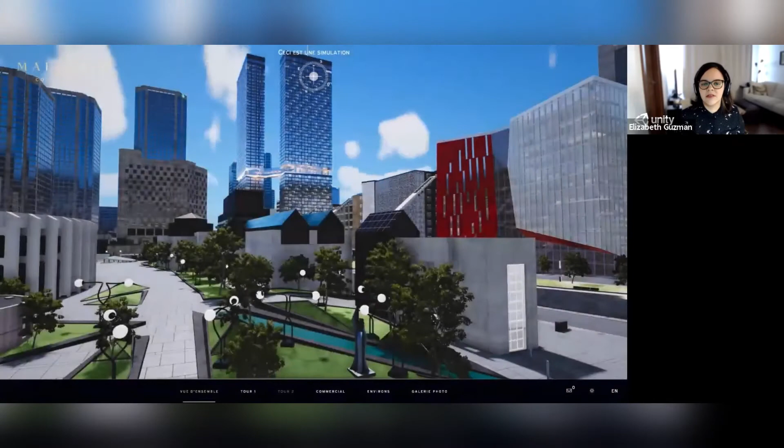You can change that material information as well, looking at the city, the vegetation, the lighting, and the different times of day. All this information is used in real estate to be able to present the model in a different way and hopefully have users experience it better.

They're doing a VR interactive walkthrough to detect flaws in the designs, the design layout, the virtual wayfinding of this airport. You'll see all the interactivity of navigating through the immersive environments, not only the interior but also the exterior, how everything looks, testing design options and layouts, how the walkthroughs will feel, whether it feels crowded, whether the space is right — you can modify it and prototype in real time.

You see the construction flow, also the traffic flow, the different components for operational effectiveness. For example, if I move this sign here, if I rotate it this way, is it better for the people attending the airport, for visualization purposes?

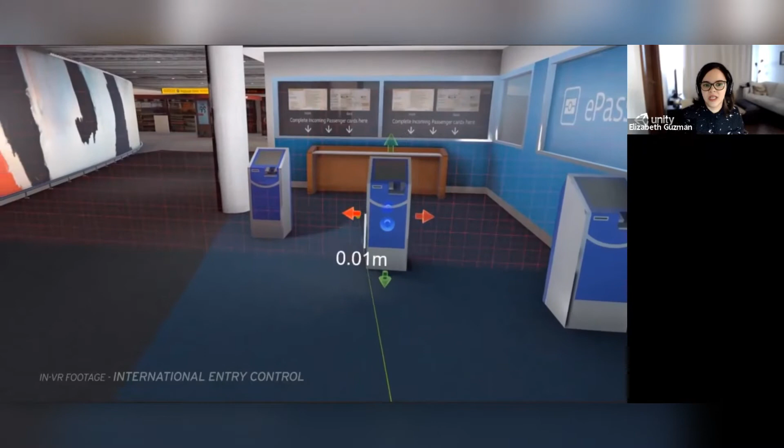You can also try to remove the check-in boxes — will that block circulation in the airport, how will that look? If you want to move the baggage claim sign, which I always miss when I'm at the airport for some reason, you can do that as well.

Not only the interior, but the exterior too. This is in VR — what if you add a wall in the middle here, what would that impact on circulation? So many prototype solutions with Unity.

Another example of how customers are utilizing Unity is for pre-construction, specifically for VR training and safety. Here we have an example of Skanska using the HTC Vive in Unity to train their workers without being on a construction site.

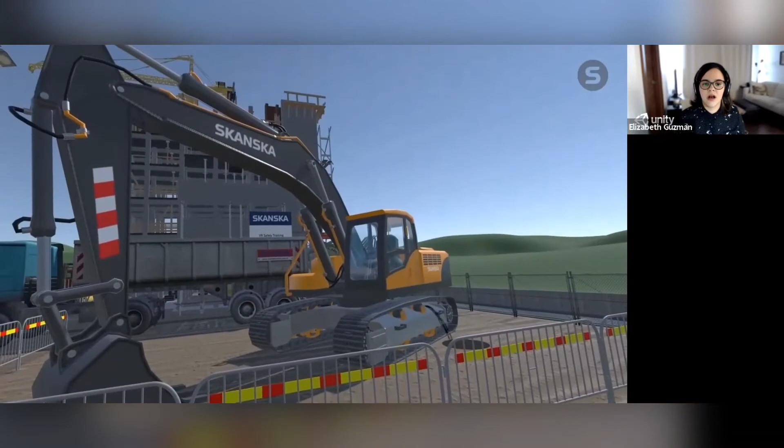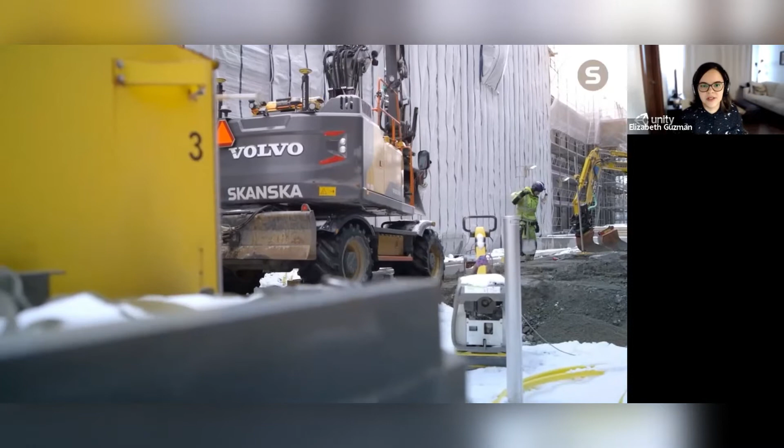In these times we're living in, you can train your crew in the safety of the office or the safety of their home, without having to be on the construction site. And as you know, the dangers of the machinery, other people on the construction site, the materials, and all that can be done safely and efficiently.

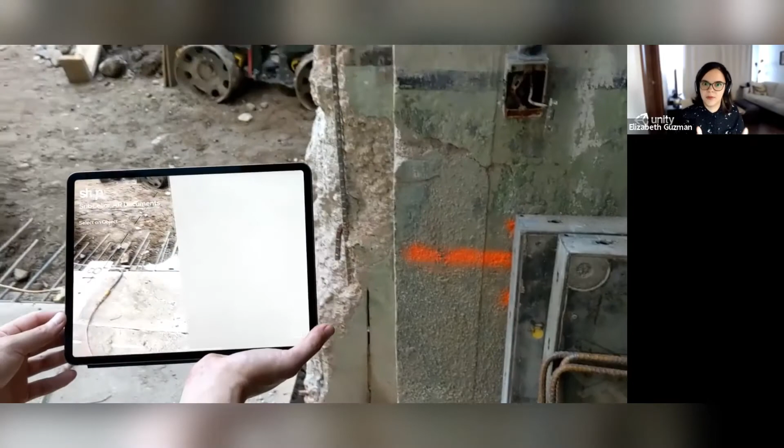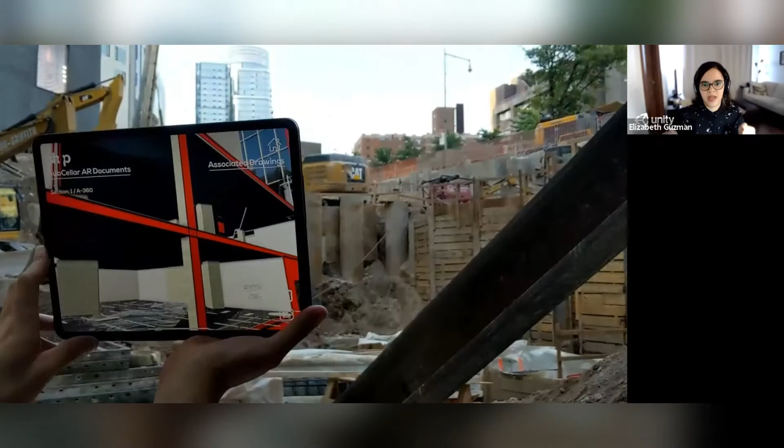Another example is AR construction guidance. Here we have Shop Architects, another of our clients, overlaying AR content into a real construction site currently being built in New York. You just grab your iPad and go around the surroundings of your building, visualizing everything with AR before the construction is done. Imagine utilizing this instead of going through thousands of pages of paperwork and PDFs on the construction site, just having your iPad or mobile device to do this type of analysis.

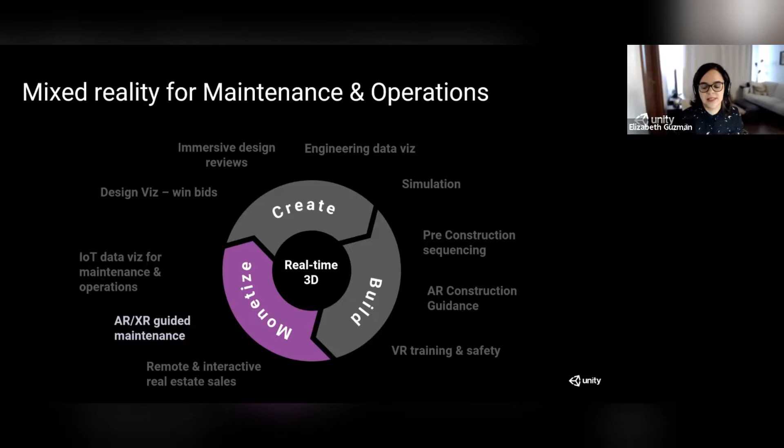Another example: let's say the building is already there, construction already happened, but now you have to maintain and operate the facilities. We have AR/XR guided maintenance. Here we have Taqtile with King County doing this type of training for workers on different machinery and different activities or menus. You have the content for training, and you can experience all the different steps. Imagine if on your first day on the job you don't want to push that red button, you wouldn't feel comfortable. So this is a comfortable way to do XR guidance in Unity.

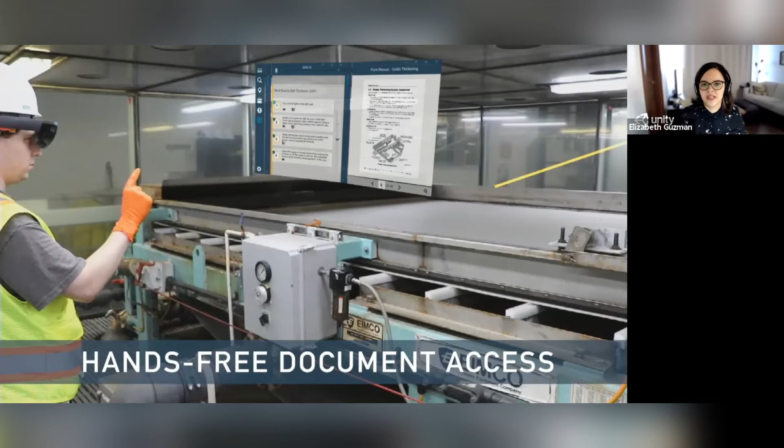We are talking about real-time 3D, but what is real-time 3D exactly? Well, it is something that is immersive, interactive, looks real, acts real. It's like a high-end video game. So with real-time 3D, you can walk through a space, through a model, open doors, change materials, see information in there, and everything — the animations, the lighting, the reflections — is being rendered in real time.

With that information, we were curious to know what companies outside of games, specifically AEC and manufacturing, think about real-time 3D, if they find it useful. So we conducted a study with Forrester last year, and 97% of companies in AEC and manufacturing that participated said they see great potential in real-time 3D. 94% of those companies have invested or are expanding their investment, and on average companies in AEC see at least 6 use cases for real-time technology.

However, only 19% are actually doing it. And the ones that are, only use it for really large models or pretty late in the design process, when this type of technology is no longer as needed. And it's difficult — we understand that the process of creating anything real-time is difficult, and there are many reasons behind that.

So with all this information, what is Unity doing about it? We partnered with Autodesk to create native plugin applications inside Revit and Navisworks to seamlessly integrate the data conversion and transformation process. Through that collaboration, Unity Reflect was born. What is Unity Reflect? It is a BIM design and coordination solution that connects all project stakeholders and members in one immersive, collaborative, real-time platform, regardless of the device they're using, the model size they have, or their geographic location. You can transfer BIM data from Revit, Navisworks, SketchUp, and Rhino.

We have plugins inside all those applications to convert into real-time 3D experiences that you can use on a range of devices. And we see that today — you can have augmented reality, you can do VR as well. With those types of devices and applications, you're allowed to bridge the gap between design and decision makers.

So it is a design review and coordination solution that allows you to do different things. You can communicate design intent in an immersive, interactive environment where everyone can participate and give feedback. It also enables faster decision making through data federation and live link.

So any changes that you make in the model, like in Revit, you change a window or the material, you'll be able to see that right away in Reflect. You can access this on any platform and any device, and store the information in the cloud or locally. You can use your computer, laptop, AR or VR headset for this.

It's also flexible. We provide the source code, so it's a flexible application that can be customized and built upon if you want to do even more than what we offer out of the box. So this is all the introduction to give you an idea what Unity or the clients are using for AEC. Now we're going to give you a live product overview of our current AEC offering, Unity Reflect. And with that, take it away, John.

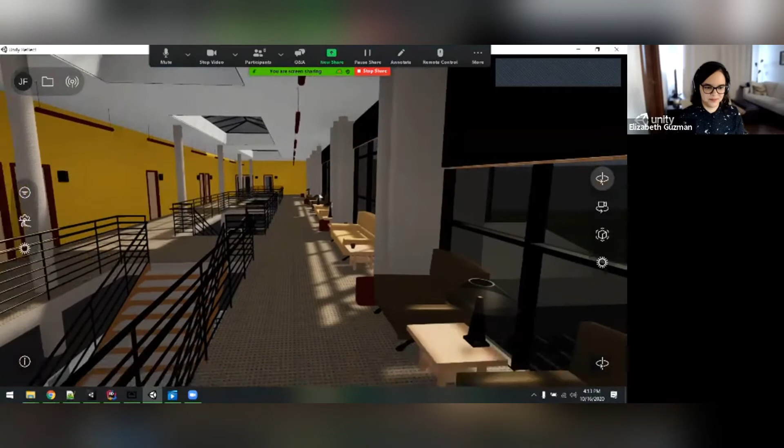Okay, you see my screen all right? Yes, we can see your screen. Okay, well, thank you.

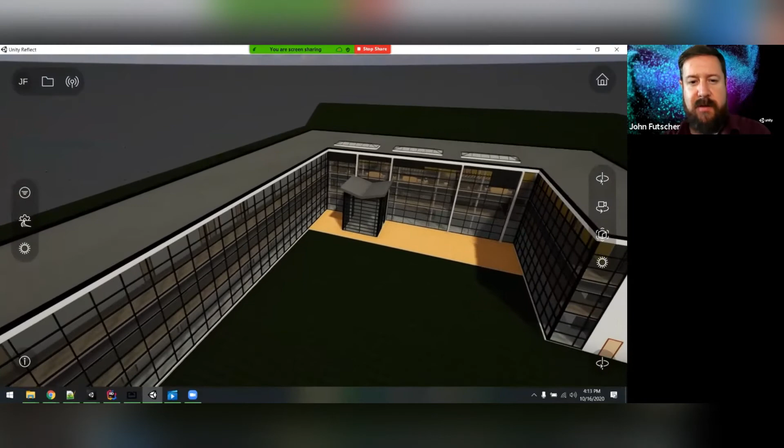As Ellie mentioned, this is Unity Reflect Viewer. It allows you to conduct design review or work with other folks on the same project from anywhere in the world on any device. So what we have here is actually a visualization of a model that is in Revit. Hundreds of miles away, Ellie is in control of that model inside of Revit. Without having a powerful PC or having Revit open, and being an architect myself, I can get a real-time look into what that could actually look like from where I am.

And it's not just a visualization tool. It actually allows you to see all the BIM data from the project. I can select different objects and actually see the IDs and the categories and families that they're associated with. It allows you to bring in folks that might not be technical and allow them to see and have actionable insight on your project in real time.

So I can say, for example, if I saw an issue, maybe that this flooring wasn't correct, I could say, Ellie, could you please change that floor to the hardwood that we talked about? And there it is. It's linked live over the cloud back to the actual Revit project that she's in. So she's in Revit, she's got full control over the project, and she can change things, update things in real time, and I can see them through my viewer on any device at the same time.

And this is really important for communication. It allows you to have actionable feedback. It allows you to make sure that my request was heard. I asked her to change something in the project, and I know that it wasn't just copied down in some meeting minutes and then applied later. I can see that it's actually done in the document of record right now, and I can see the results.

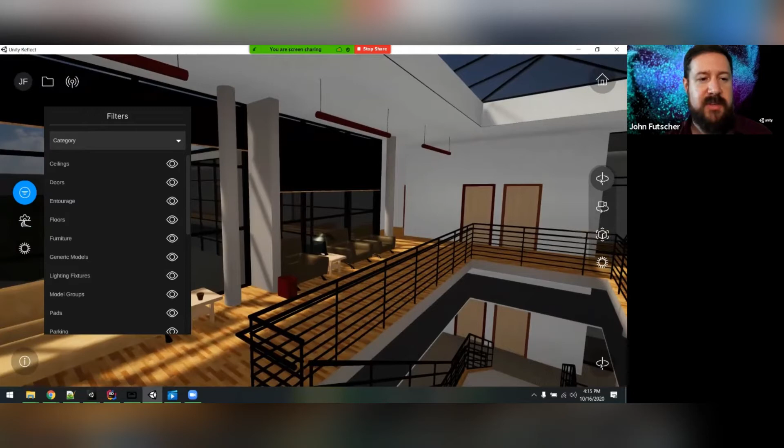It also allows you to do things like filtering on all that data that comes in from Revit. So we have the ability to categorize things and filter, like here's all the doors, or the ceilings. We also have the ability to break things out into different potential phases. So this one's actually a phased out diagram, so we can back away steps of the process and see what it would look like at different points in construction.

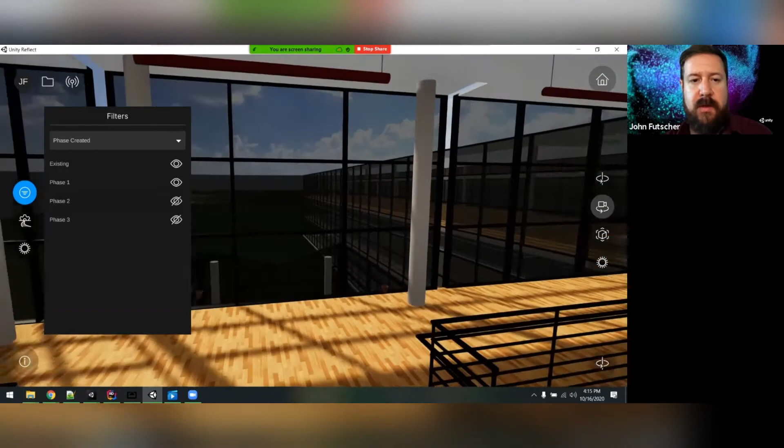And we can bring them all back in pretty easily. But we can also hide unneeded details, like all the textures. If you're looking for a white card review that is more about the layout and making sure that everybody kind of stays on topic and focuses on things that matter, we can hide these things.

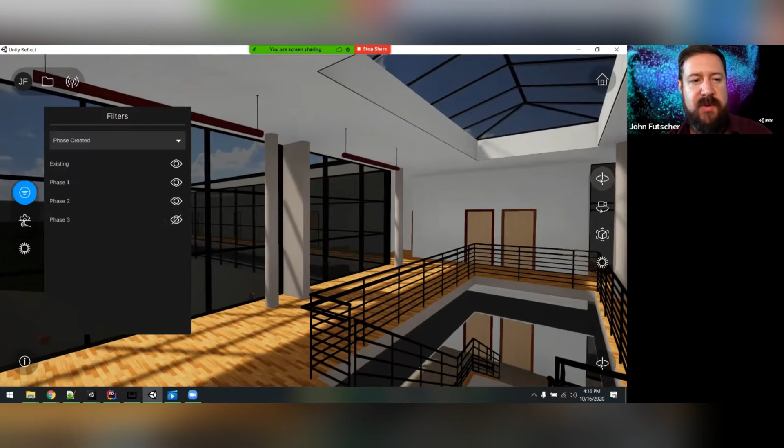And we can also light things. So if we bring this back in, we also have our lighting. We can turn on the interior lights and get a sense of what the space would actually look like without natural light. This would be important if you're trying to review the space with the people who are responsible for the lighting, but also that leads into our sun study tool.

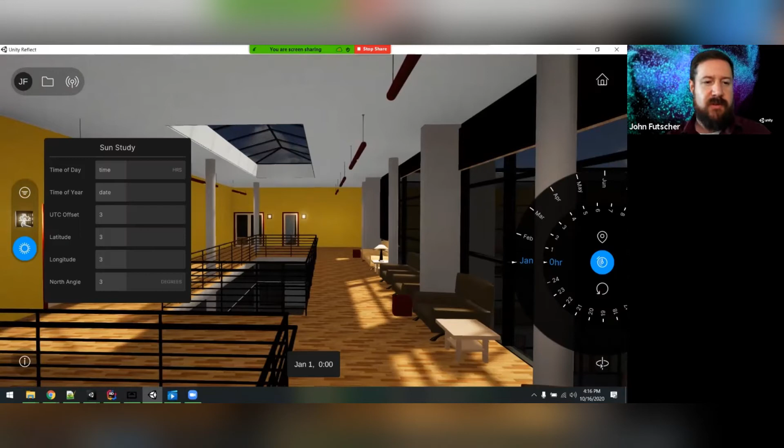If you know the location of your build, you can put in your latitude and longitude of anywhere in the world and your time of year and say, what would the light look like in this room in, let's say, early morning in the winter. And we can see that around 6 o'clock there's a lot of sun going into these doors. It allows us to see in real time what that might look like.

And we can see even further if we back this out. If those window shades weren't there, that's what it would look like. But we can see that update in real time.

And everybody gets their own view into the project. This is my own personalized view. I don't need any real technical expertise or background. Your standard mouse and keyboard inputs work. You can also teleport around in the space by double clicking.

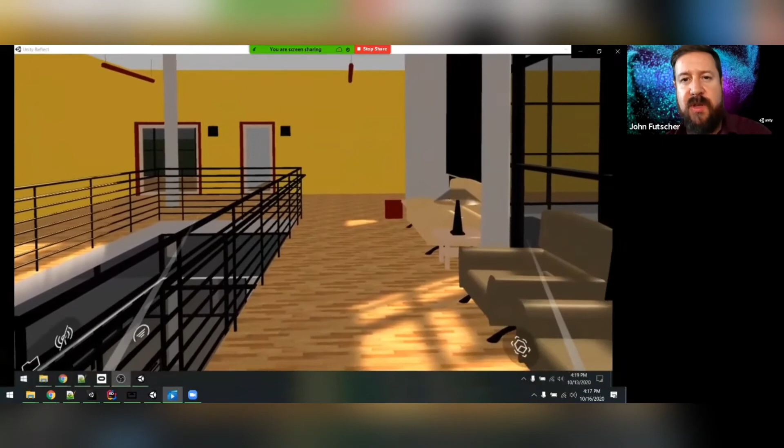And furthermore, right out of the box, we offer the ability to have other views, such as virtual reality. So here's the same space being viewed in virtual reality. I know some folks might have attended a webinar earlier about how to use VR with Unity. Unity and VR work really well together, and so does this.

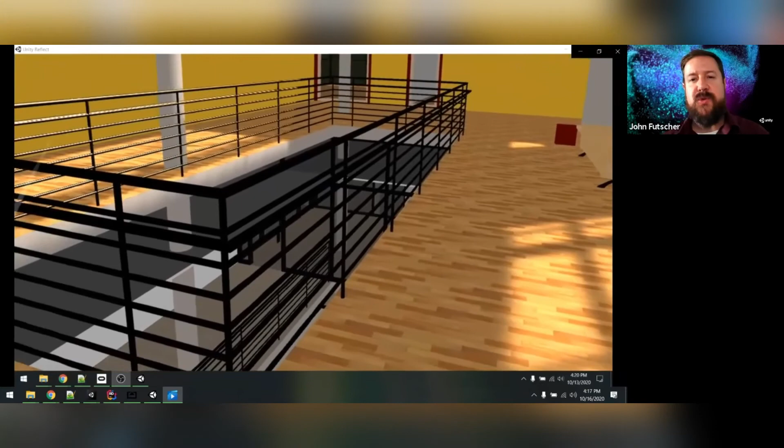Without any other preparation, you can use that same data from your Revit model, bring it into the viewer, and in one click fire it up in your Oculus Rift headset, and visualize what it could actually be like to be there within your headset.

VR offers that real, true 3D stereoscopic rendering, so you can actually see how far away the walls are, feel the size of the room, like is the hallway too tight, does the room feel nice and airy? But that doesn't come with any lack of functionality.

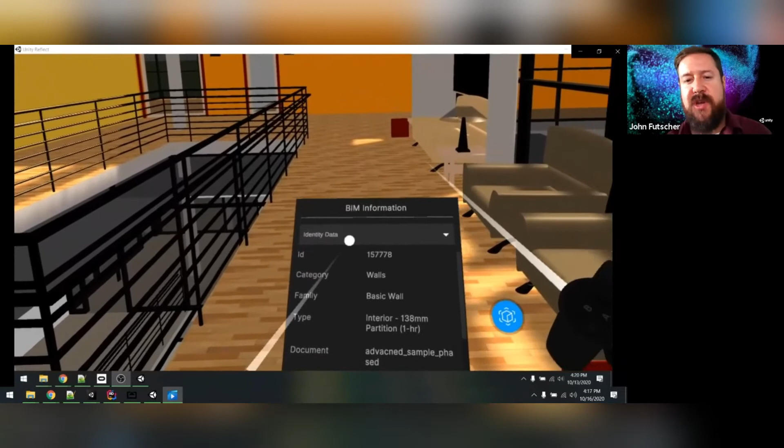The same filtering and BIM data selection tools are also available in the VR view. This could be a really great way to get a sense of the space you're actually building without doing any separate processing. You can simply jump in your headset and look directly at what would be in your Revit model.

It can also generate excitement amongst your customers, giving them an idea of what they're going to be looking at when it's complete. We also recognize that not everybody might have access to VR headsets, but one thing that's fairly ubiquitous these days is mobile devices. So here is the same project being viewed on a mobile device.

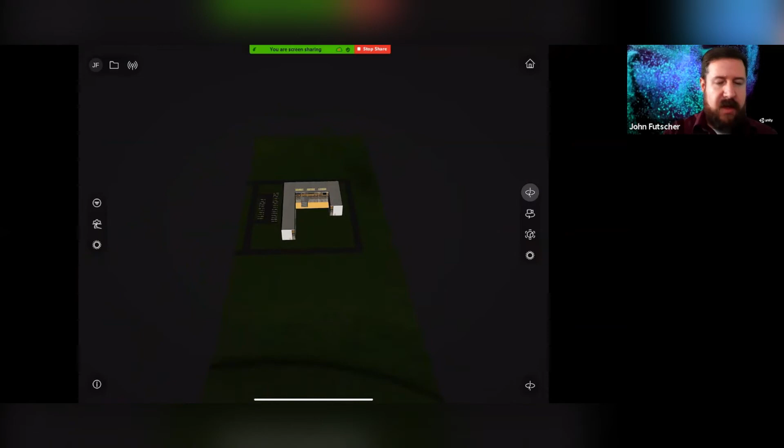And if I asked Ellie to change the exterior of this building, we could see it updated live as well. This is all the same data, just another view on another device. We have the same ability to get our BIM data, select different objects, and see the exact data related from the project, with simple touch commands and simple basic filtering.

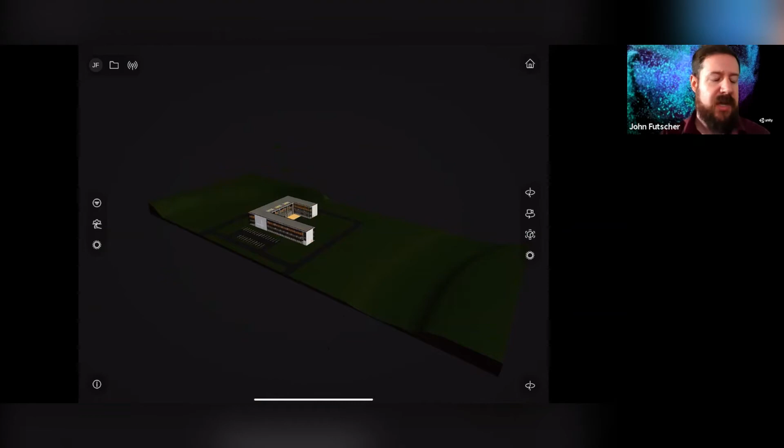Now, the main question I generally expect is, how am I going to get my giant architectural model onto a mobile device and be able to look at it? Well, to that end, let me load a slightly larger model than the one right here.

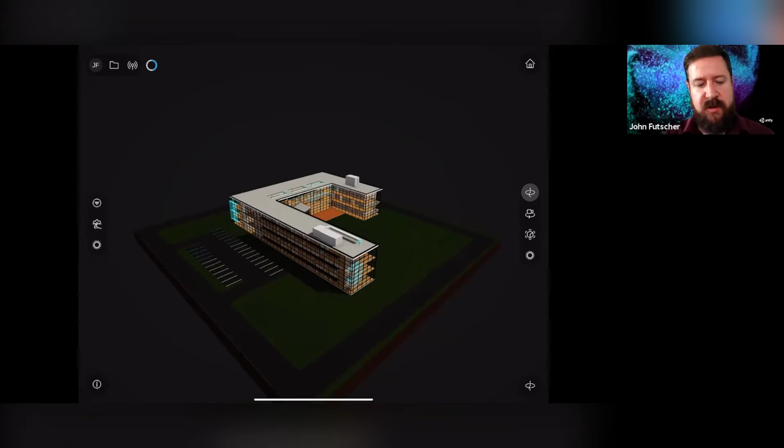What you're seeing right now is our progressive streaming algorithm. There's a custom algorithm at play here that allows us to load the model iteratively. It will focus on whatever's closest to the view, allowing you to begin interacting with your data immediately while it's not all completely loaded. It will all eventually load, and it will load on any device, but it also lets you get right in and start looking at things without having to wait.

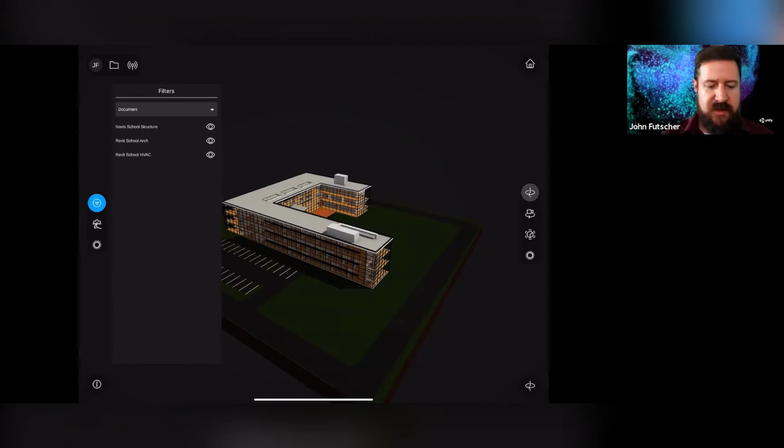This is an even larger model than the one I showed before, because it also integrates federated data from Navisworks, allowing us to isolate things like the HVAC system, or just the structural diagram, or view them together with the architecture to see if there are any conflicts. It's a real intuitive way to see that.

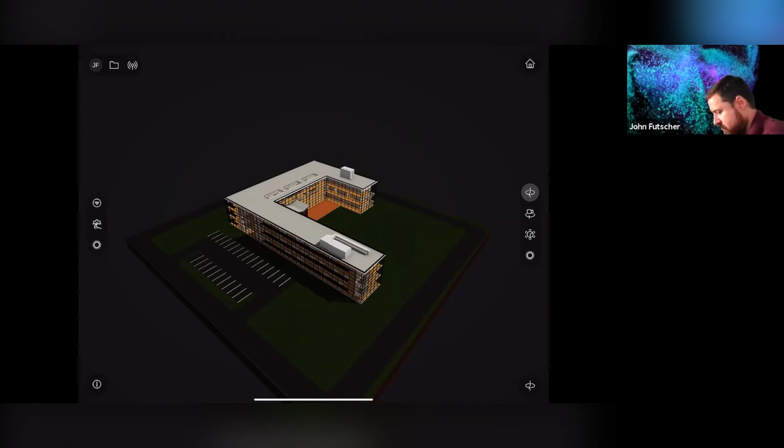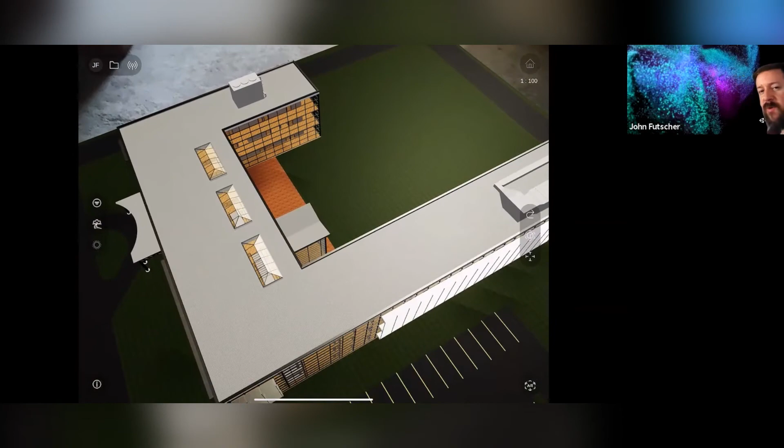And lastly, but certainly not least, we also have the ability to put this out in augmented reality. This is great for extremely non-technical folks because it requires literally no inputs to get a different viewpoint on any given position. I can stand up and walk around the model and look at it from any point with my mobile device.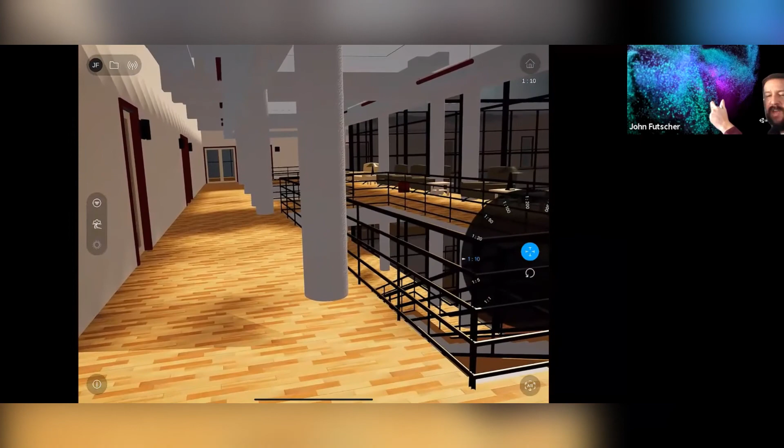And of course, I have access to all the same filtering tools, but I can also scale it. I can bring it up a little bit bigger to get a view into the space, similar to what we see in VR, but this is also just through a mobile device—Android or iOS, any device can do it.

You can see right through and bring this all the way up even to 1-to-1 scale, so it's almost like walking around into the space. You can actually see what it might look like turning around into different areas. And this is all the same data coming directly from the actual project itself, viewable in multiple different ways in the Reflect viewer.

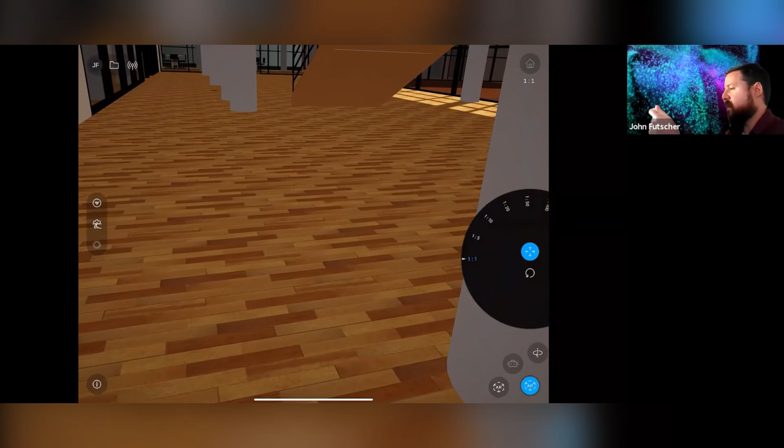And with that, I'd also like to note that if there's anything we showed with the Reflect viewer that you thought was missing, or something else you might want to do with it, the Reflect viewer itself is actually built with Unity. So with Unity Pro, you can customize it into anything else you could think of. It's all extensible—you can develop your own custom solutions.

Ellie showed an example from SHoP Architects using the 1-to-1 scaling—that was the Reflect viewer. They made a custom solution to show their building at the job site before it was completed.

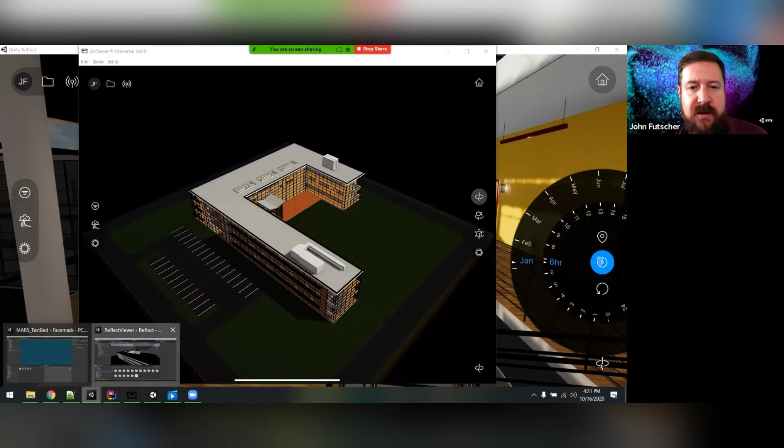That's absolutely something that you can do by extending it out. It also has integration into the editor itself. So if I pop up the editor, here is another look at the model I just imported real quick. It's all gray boxed right now, but this is the same model we see here directly in the editor.

With the structural and HVAC stuff that you just saw. Once it's in the editor, if you know how to use Unity, and there's lots of free tools, resources, and trials available, you can pull this right out of Revit or Navisworks, get it into your system, and build on top of what we've already shown.

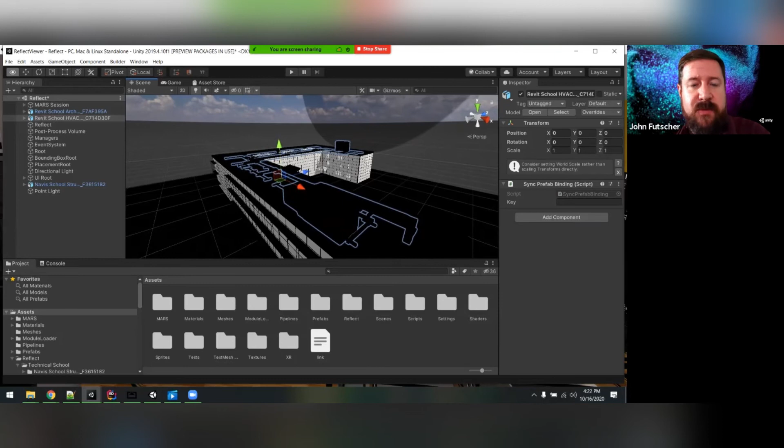Let's do our small recap of everything that we saw. As John was mentioning in the presentation, for Unity Reflect we have third-party plugins for different applications, including Navisworks, Revit, SketchUp, and Rhino.

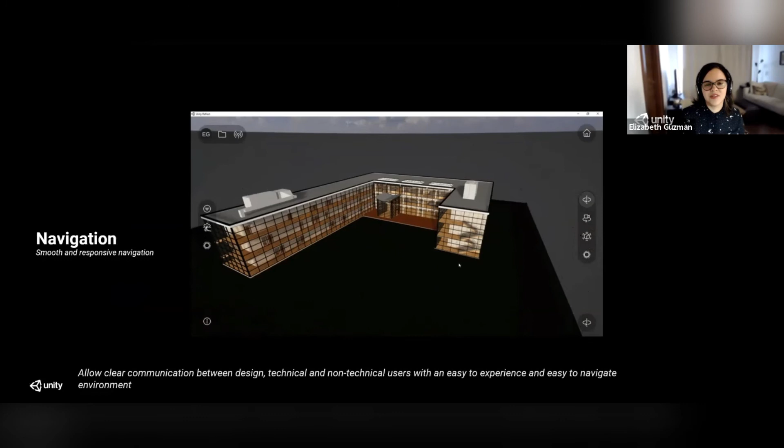We have the cloud option that allows you to share your model to the cloud so it's accessible to anyone, tying the office to the field. You also have easy-to-use navigation that doesn't require additional training for users to immerse themselves and interact with the model.

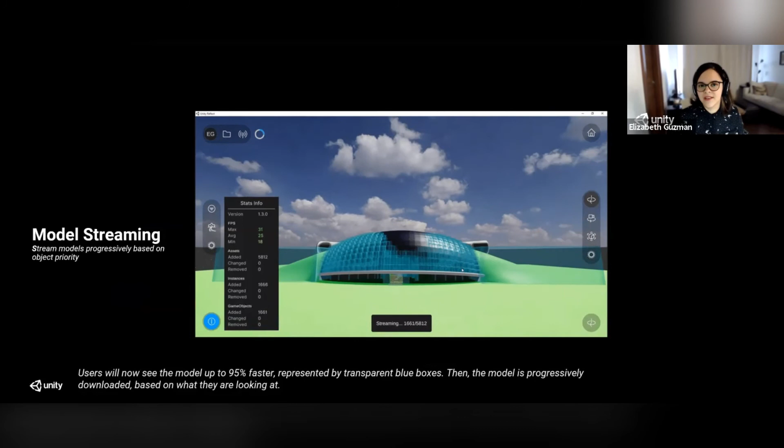As John showed, we have model streaming, which allows you to load the model 95% faster, so you don't have to wait for the entire model to load to interact with it. That's the progressive streaming we have, and based on what you're looking at, object priority lets you view your model different ways.

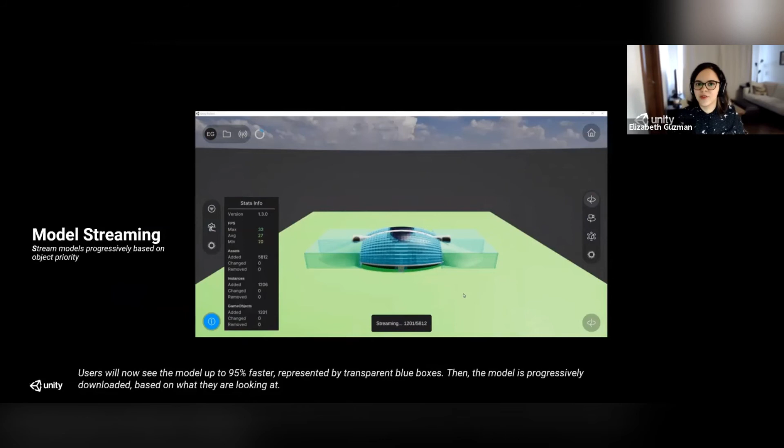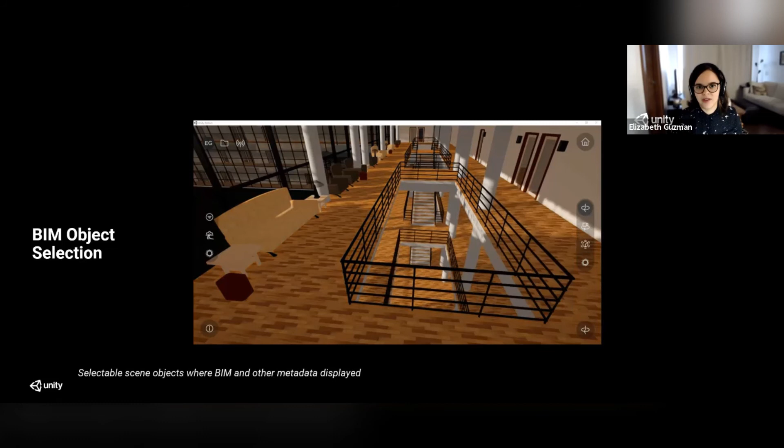You also have BIM object selection, so all the information from your platforms, Revit, SketchUp, Navisworks, and Rhino, can be visualized by selecting different components in your model. You'll see all that derived data and can filter by it. As John presented, you can isolate information, or simply hide and show information in your model.

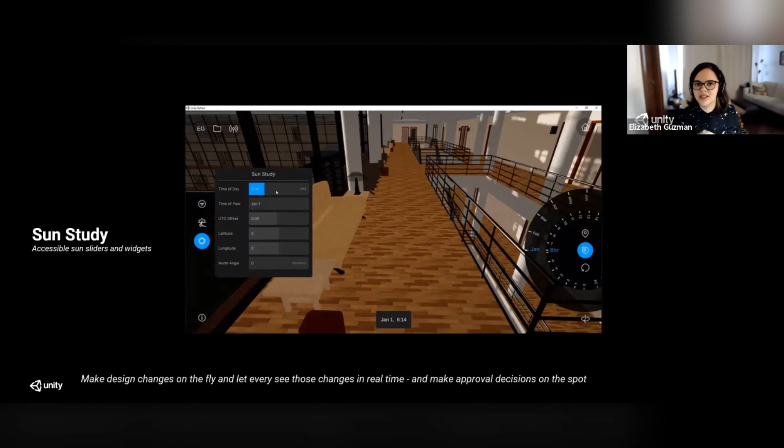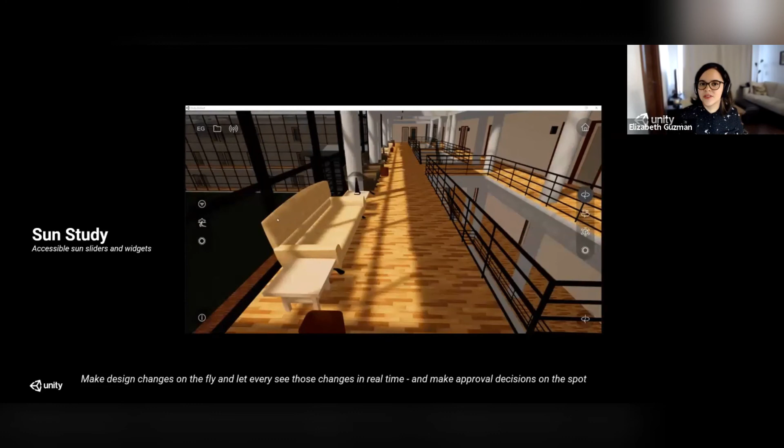You also have the sun study tool, an easy, accessible wheel you can slide with clicks on your computer or your fingers on a mobile device, to look at the sun at different times of day and year, analyzing natural and artificial lighting conditions in the space.

And as you saw, you don't only use Reflect on your desktop or laptop, you can also bring it to VR and AR modes, allowing anyone to access their optimal platform of choice.

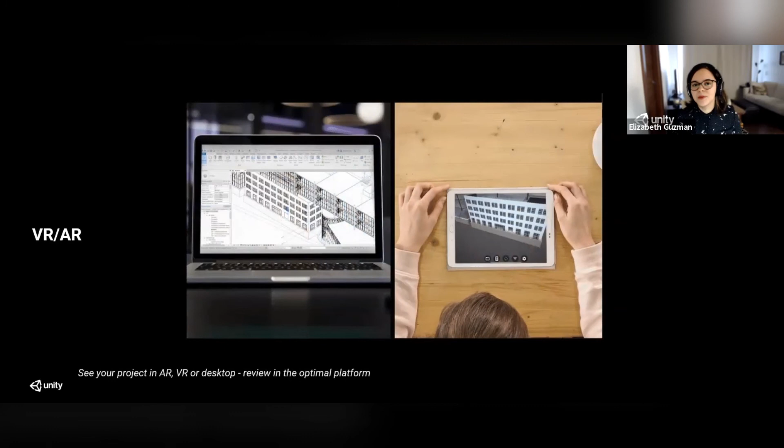If you want to do more than what we offer out of the box, you can build upon it using the Unity Pro engine. We offer the Oculus Rift VR headset out of the box, but if you want to use the Microsoft HoloLens or other VR headsets, you can bring this to the editor and export it to the 24-plus applications we support.

We have some resources here as well. Our Unity Learn Premium is free to access for anyone, with different trainings not only in AEC but also in games, film, manufacturing, and automotive.

We also have a free Unity Reflect trial if you want to use it and try it out. You can download the information, play around with the model, and see how that looks in Unity and in the editor.